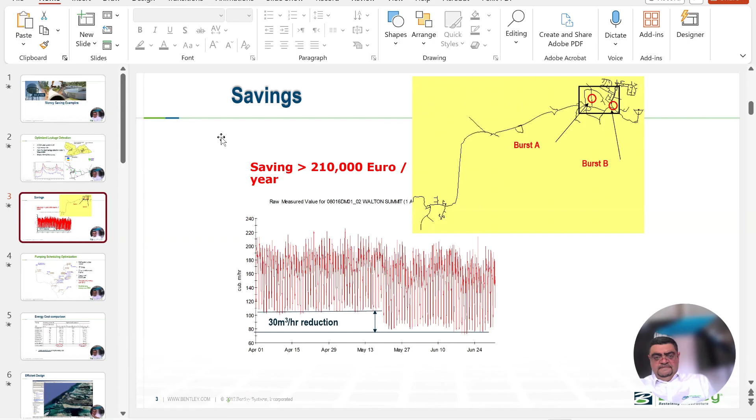The operational phase is actually the electricity bill. For example, I'm not sure if I'm still right, but one time I was on a visit to Nairobi Water, and when we asked about their yearly bill for electricity, it was about, I think, $11 million. Imagine if you can save just, let's say, 10% or 20% of this bill, like $2 to $3 million. That is a huge amount.

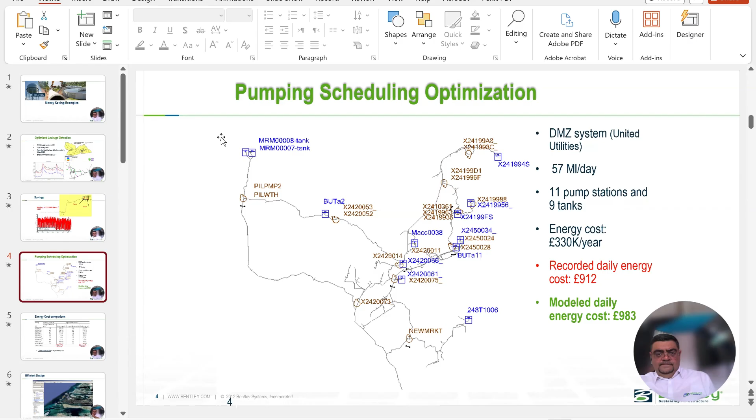This is an example of a DMZ that's using 11 pumping stations and 9 tanks, and their energy cost was about 330k pounds per year, resulting in 912 pounds daily energy. We were able to reduce this from 983 to 700, which is almost 29% of their original energy cost. So this is another place where we can save energy.

Mercy, or someone from Indepth Research Institute, can you please mute yourself? Hello? All right.

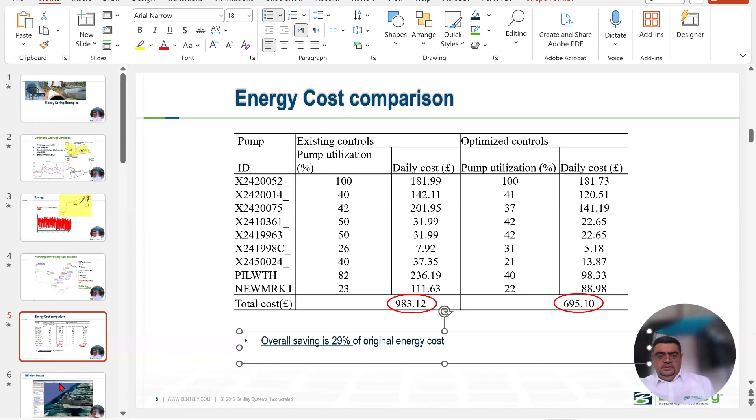Also, when it comes to design, since we have a lot of consultants here, what they normally do is build their design geographically, so they draw their network, and then they go to the Excel sheet, and in the Excel sheet they try to, for example, do the pipe sizing, and that's what we call a disconnected design. Whenever you need to make one change, you have to go to the Excel sheet and then come back again, and that is too difficult.

So in this case, we decided to go to the connected design. Whenever you change the location of the manhole or the pipe size, the system will change the rest of the pipe sizes for you, and it will show you how your system will look. We did a test of one water network study with two consultants. We asked one of the consultants to use WaterGEMS, and we asked the other consultant to do his design. And then we asked for the optimized design.

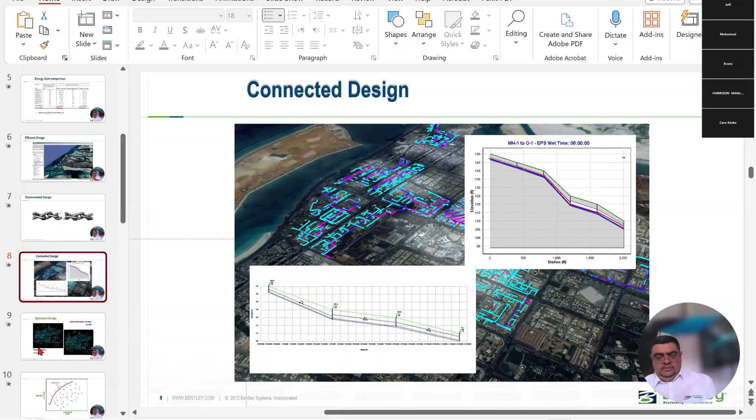After this happened, the big consultants came with a solution for 4.16 million pounds. But when we ran it using Darwin Designer inside WaterGEMS, we got a solution under 2 million, and we chose an optimized solution for 2.14 million pounds. So even when we are designing, we don't want to go for oversizing. We want to design our network right, and Bentley WaterGEMS can do this process for us.

So it depends on the iteration. Normally when you do a design, you say, okay, let me try, for example, a pipe of a size of 100. And then probably it's not enough. Let's do 150. And then, okay, it's not working there. Well, it delivered the water over here, but some other part of the network is not delivering. And then we get into a lot of messes.

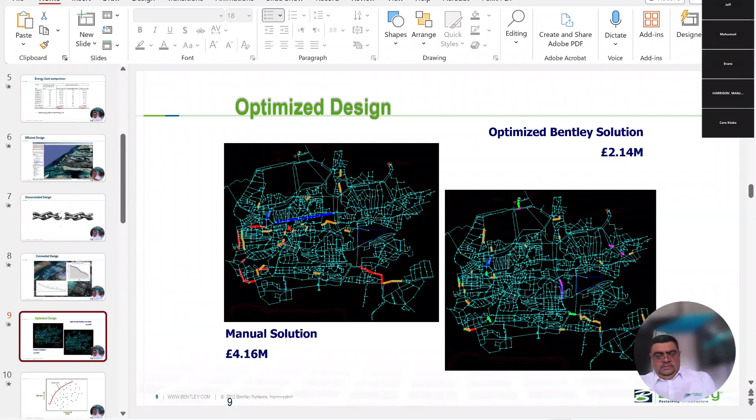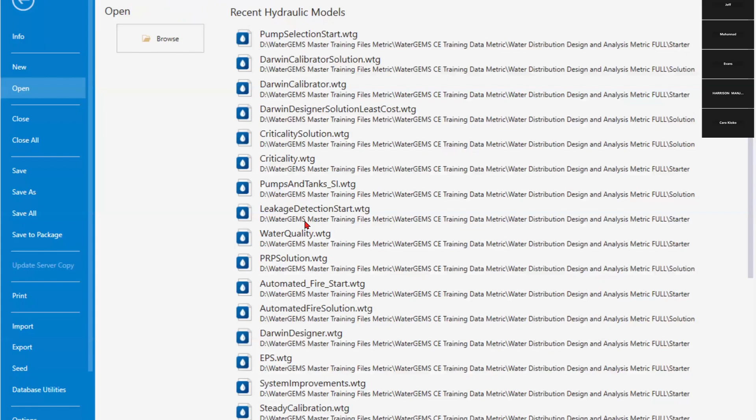Well, we talk too much. Probably now you would like to see how the software is working, and for that I prefer to go to WaterGEMS directly. So this is WaterGEMS, and let's go through the first case. Let me open the leak detection, and let's discuss how leak detection happens using hydraulic modeling and how you can save time.

I get my network here, and this is an isolated network, an isolated DMA. This is the entrance of the DMA, and we have put a virtual reservoir over there. And then I have a few pressure sensors. Let me change the color of the pressure sensors so you can see them more clearly, orange probably; in green it's not that clear. So I got my 6 pressure sensors here.

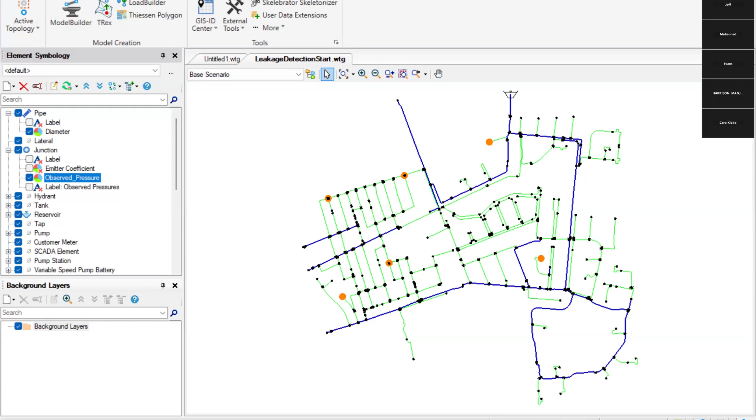Now at the beginning, I want to understand if I have leakages or not. I have my network in an extended period simulation. So let me run my network first. Wait, let me make it a bit smaller so I can control it better. All right. I'm going to go to analyze and compute. I want to compare how much I totally give this network. The demand that I have here is actually the demand that came from the customer meter data.

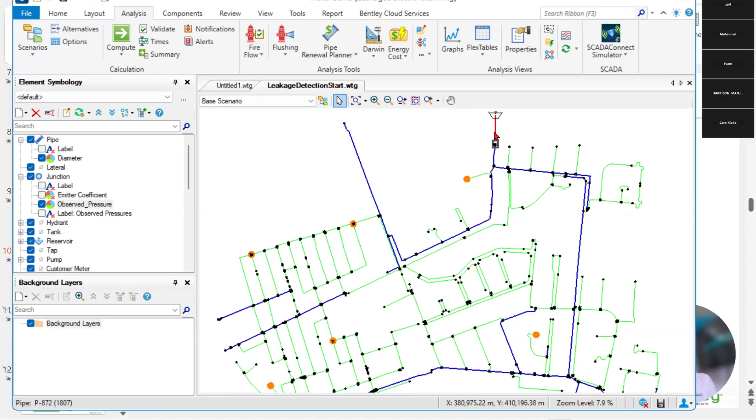In order to find if I have leakages or not, I get the demand from the customer meter data into the network, and I put a flow meter over this pipe here. I need to compare both flows. The total flow from here is what I have billed the customer for. Let me graph it as absolute flow. That is what the customer has paid for. I have put a flow meter over here just after the reservoir, and I need to compare with this value for simplicity.

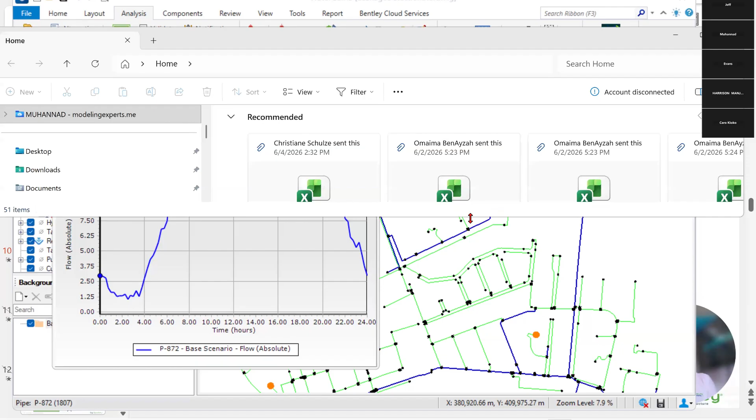Normally we have it as a flow meter. Probably it's connected to the SCADA system, or probably it's just a portable flow meter, whatever it is. But I have my data now here in the Excel sheet. All right, so I get my flow meter over there, and that is my flow meter reading over time.

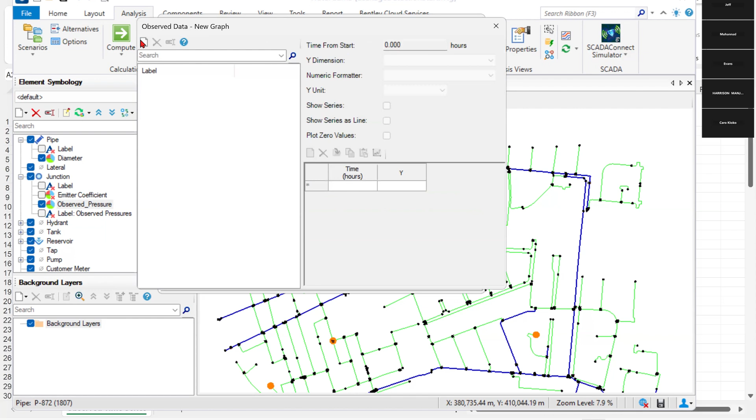In a very simple way, I'm going to right click here, copy it and paste it. This is just for simplicity, but we can do it in an automated process. And that's my graph here; this is my data for the graph. I need to put my observed data from the field, and that is my real supply data. I'll paste my Excel values here and close this one. And that is what I get from my flow meter data in my Excel sheet.

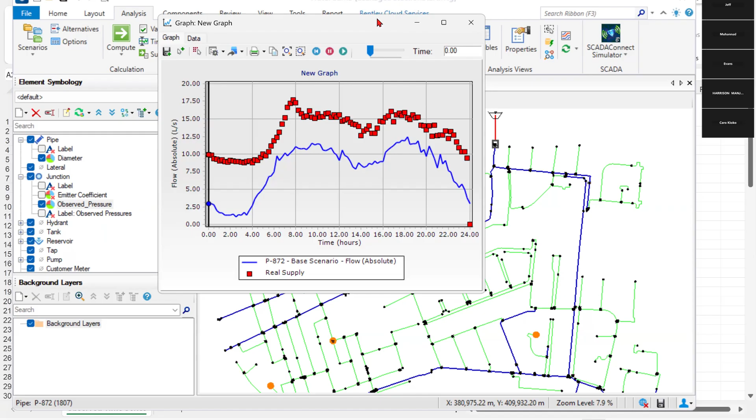So now what I can see here is my real supply, and that is my customer meter data. The area between these two curves represents the volume lost. Now we need to understand where this volume has been lost. To understand this, I have 6 pressure sensors: 1, 2, 3, 4, 5, and 6. You can see them here in orange.

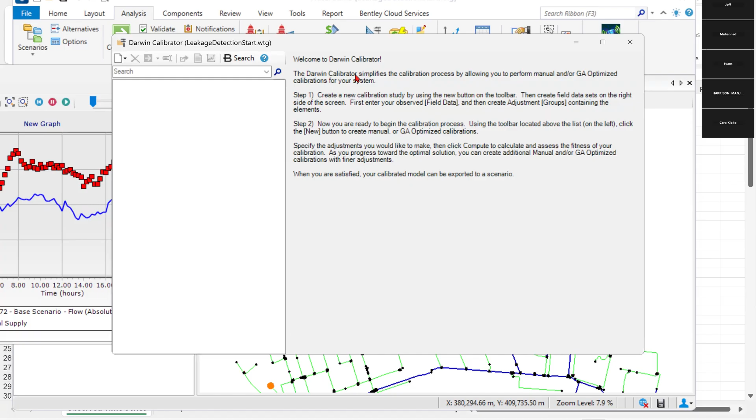I need to bring this data into my Darwin Calibrator in order to understand where these leakages happened, comparing the pressure collected from the field with the pressure from the customer meter data set. Again, for simplicity, I have the data here in the field data. You can see I have the hydraulic grade line of these sensors and the flow meter data.

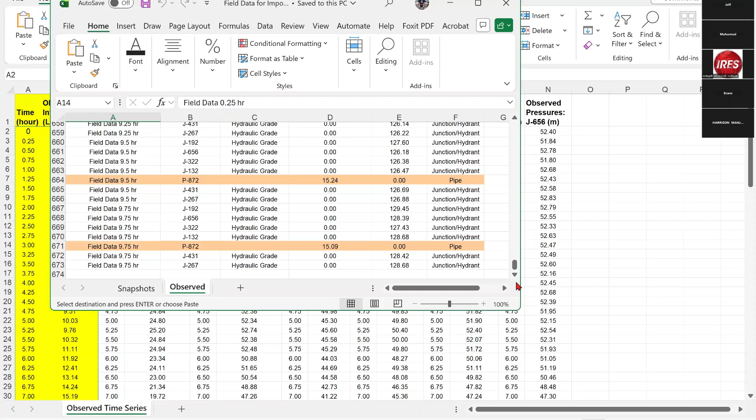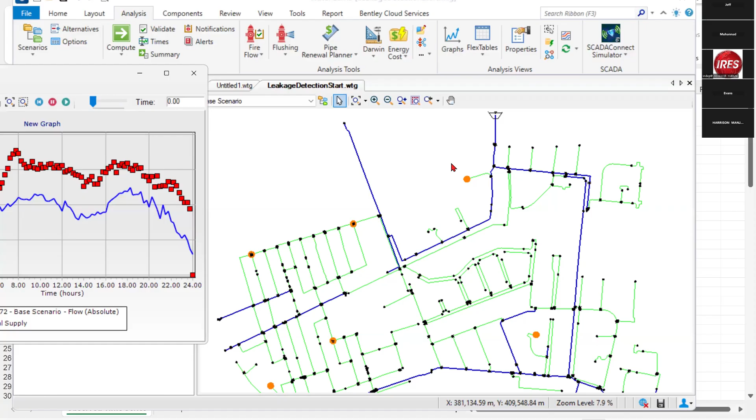And I need to bring this data, 672 records, into my Darwin Calibrator. In WaterGEMS, for any external data that you need, we have a tool that's called ModelBuilder that brings the data from any external data source into my WaterGEMS. So I need to bring the data into my Darwin Calibrator over here, which is now empty. So I'm going to use, in the tools, the ModelBuilder.

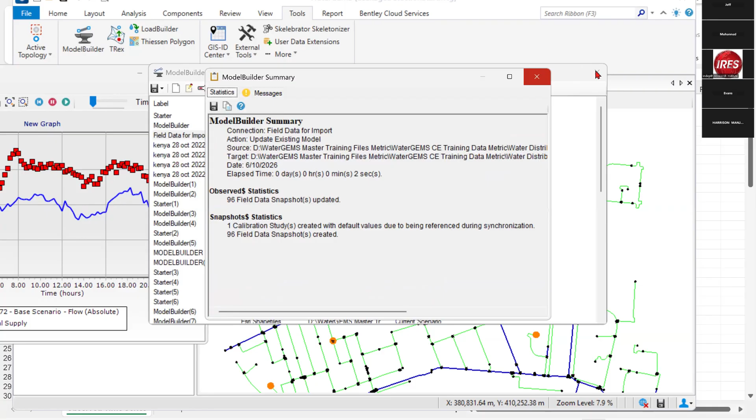And I have specified it previously here. So I'm going to get the data. And then when I put it in the model, I get 96 snapshots and I get 672 records. And then if I go to my Darwin Calibrator, now I'm going to find my data over here.

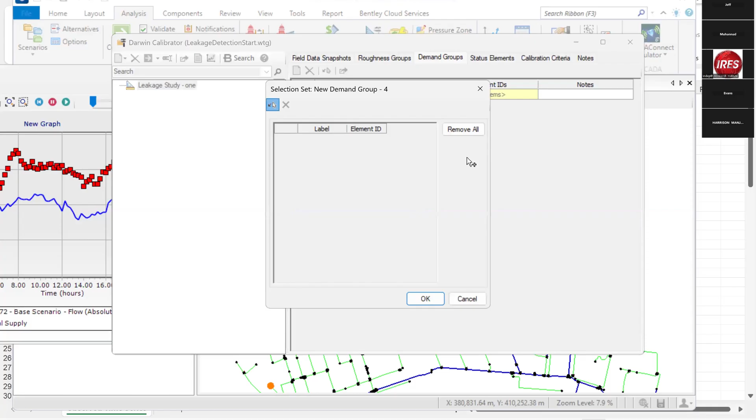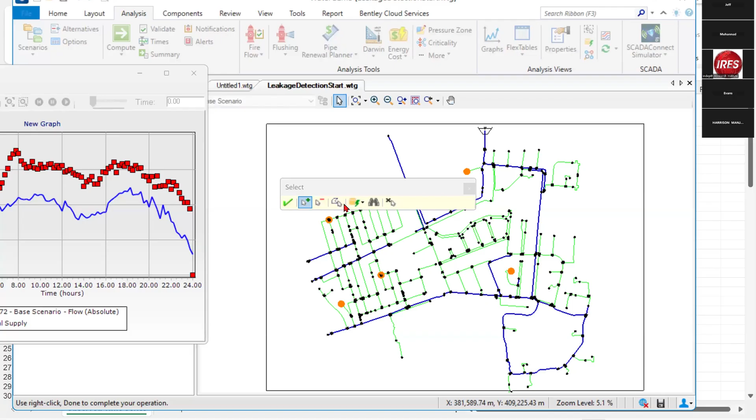Now, what I need to do is to find the leakages. And leakage is a type of demand. So I have to create a kind of demand group. Let me just create a new one. I'm going to add all my nodes in the network. So probably I can zoom a little bit out. And now I select all my nodes. So I get here 701 nodes in this DMA that need to be tested against leakages.

So in a simple way, I can go to a new optimized run here. And then I can go to the demand, and here I'm going to specify my operation. So rather than calibrating a demand, I'm detecting leakage nodes. Leakage acts like a sprinkler. It's a pressure-dependent demand, so it depends on the emitter coefficient. So 0 where there is no leakage, and the maximum is 0.5 for the sprinkler coefficient, and I need to increase every node by 0.01, and I say, detect a combination of 10 leakage nodes maximum at my first try.

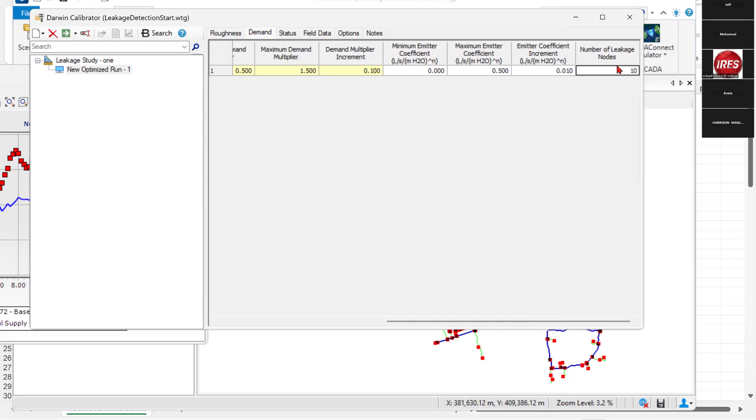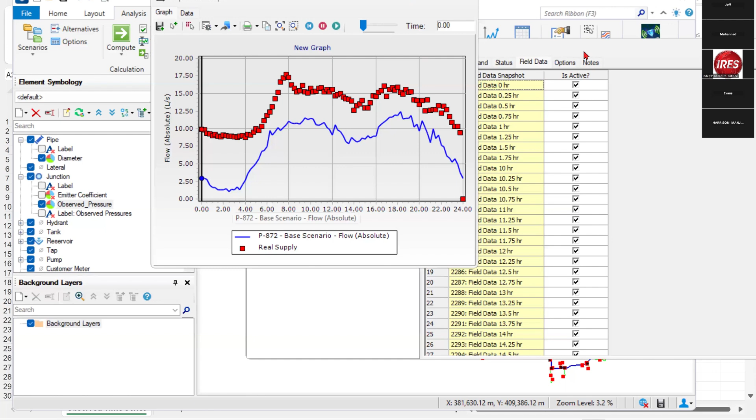And then I'm going to go to the field data here. Here we have it over 24 hours, but normally we use the minimum night flow. And if I go back to my graph, I can find that my minimum night flow lies over here. So probably around 3 o'clock, 2:45, something like that. So I'm going to deactivate all of these, and then go to 2:45, a little bit up. All right, so this is 2:45.

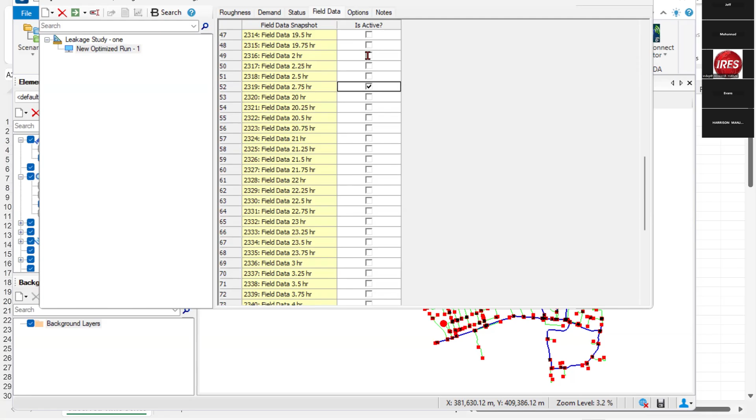And then I'm going to go to the options. I say, go through 50,000 trials and give me your best solution. I'm going to run this one. It will go to my network over here, selecting at the beginning maybe 2 nodes, then 3 nodes having leakages, then 4 nodes, adjusting the leakages, putting the pressure-dependent demand, and making multiple combinations for these nodes. And each time you can see my fitness is reducing with my trials until it finds the best situation of my leakages.

So let's give it about a minute more. What happens is that it goes to every node, sees how the hydraulic grade lines look, and then it changes the flow and the demand of that node until it matches. And you can see with the generations, my fitness, which is my error, is being reduced until it reaches a compromise solution. After 50,000 trials, this gives you a very good quality of testing, and it gives you the minimum error one, and then you have to go to these locations to test if you have leakages or illegal connections or not.

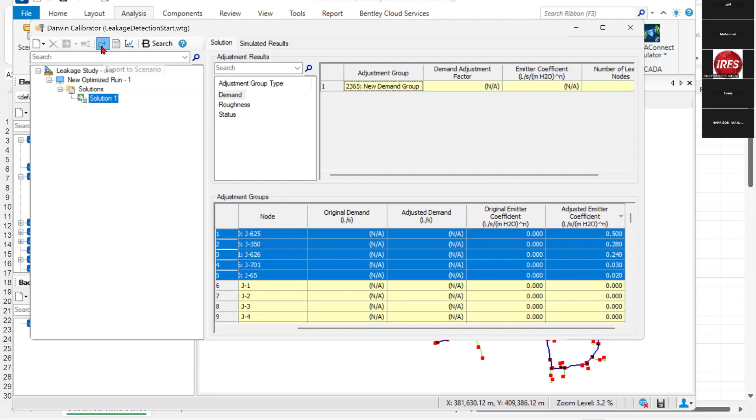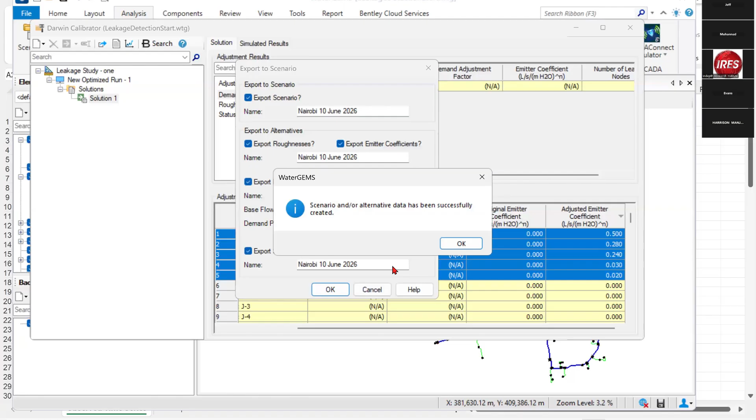So I get my solution, and if I sort this descending, these are the nodes. I got 5 nodes that have leakages. And now I need to understand where these nodes are. So I can go to the solution over here, and I can export it. And I can say, this is Nairobi, 10th June, 2026. And then I'm going to rename my alternatives. And when I click OK, my scenario has been created. And I can find my scenario here, Nairobi, 10th of June, 2026.

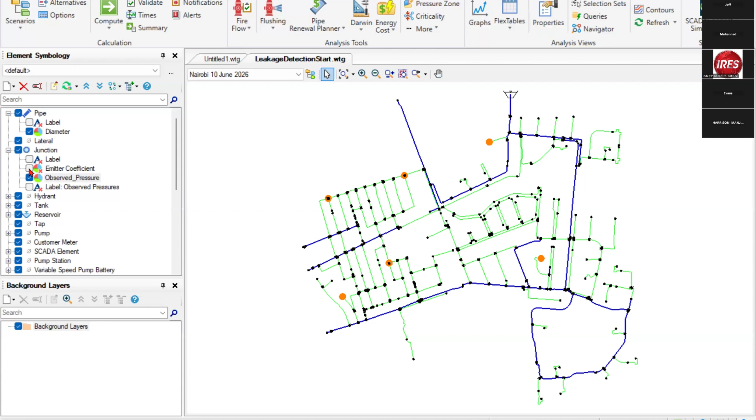So now where are my leakage nodes? Simply, I'm going to look at my emitter coefficient. And I can see that there is a huge leakage over here, and 2 small ones over there, and a medium leakage over the pipe here. And if you go with your acoustic device after that, you're most probably going to find the leakages at these locations. So we're not fully eliminating the noise logger or the helium method or the ball method, but we limit your search area to where the leakage is happening. And that is how we do leak detection with hydraulic modeling.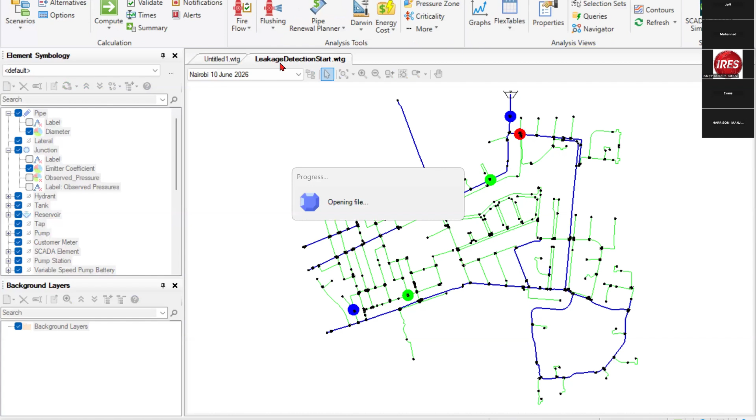Well, as I told you, the other part of the network is about pumping and pumping pricing.

So what we have here is a city called Prague. And this is the touristic district of Prague. They came to us, they said, during the high season, we have no problem. But during the low season, if the cubic meter costs $1 for pumping in the high season, in the low season it costs 2.5. Say, what? Why? Is your network over pressurized? They said, we don't know, but maybe.

And then, of course, it's over pressurized. It's like they got here where their pumping station is, and they have an equalization tank over this area. And then they are pumping from two big pumps. These two big pumps. And then a consultant came and they asked them that, okay, if that is the case, and then they add another two small pumps.

Good idea, but this is not how we should do it, actually. We need to do our study in a different way. So Bentley had created the pumping station concept, and the pumping station concept idea is to create for me a combination pump curve. So here I get two big pumps and two small pumps.

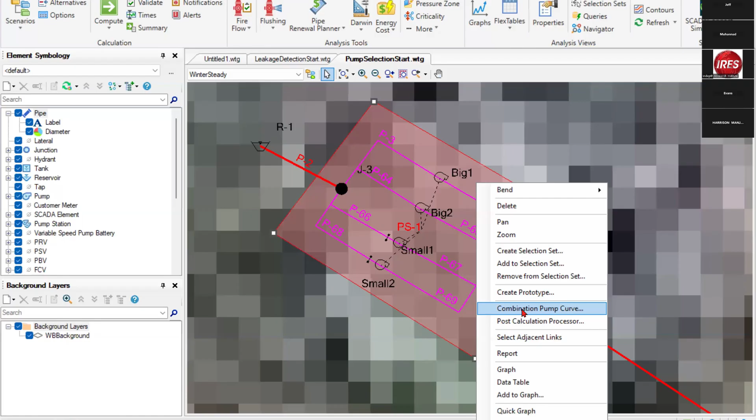And then if I right click here and say pump combination curve, it gives me all the possibilities here. So this is the big pump, this is the small pump, and the possibilities to operate this pumping station. It's either one big pump, two big pumps, one small, one big, one small, two big, one small, and two small, and one big, and the full capacity of the pumping station, it's two small and two big.

Okay. Let's suppose that we need to run at 500 liters per second. In that case, we need to know which combination gives me the best efficiency point during that time. So I'm going to remove the head curve from here, post the efficiency, and calculate. And then that is my efficiency. And then during my design, I have to design my pumping station with a pump selection in order to have a wide range of flow that's giving me the best efficiency. And here it's somehow good.

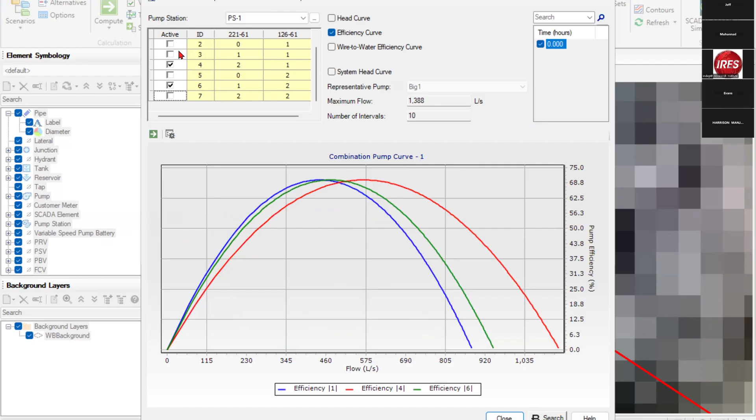But if I'm running at 500 liters per second, which is somewhere here, I'm going to keep the blue color one, which is efficiency 1, efficiency 6, the light green, and the red, efficiency 4. All right, so let me switch the others off. So I need 1, 4, and 6, and nothing else. So if I'm running at 500 liters per second, probably efficiency 4 is not required. And in that case, the best combination of the pumps is either I switch two big pumps or one big pump and two small pumps.

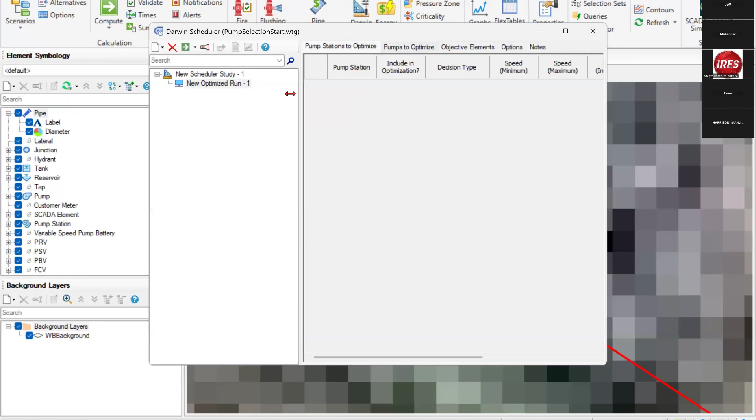All right, that is good, but I need to understand how to build up my schedule, my controls, how I'm going to tell my operator to run with this schedule. In order to do this, I have in the analysis here something called Darwin Scheduler. And in Darwin Scheduler, I can create a new optimized study. And then for the pumps to be optimized, I can select these pumps.

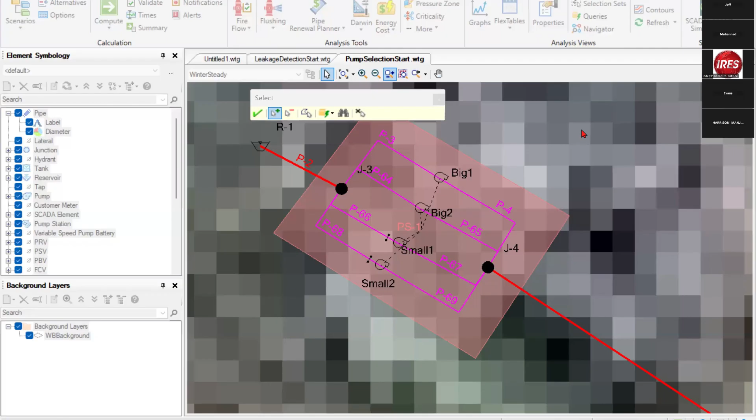But during optimization, I need to give it my constraints. So for my constraints, I'm going to say, well, I have pressure constraints for all my network, and then I can give it a minimum and maximum pressure, velocity constraints, and how many times I allow the pumps to start and stop. For example, my maximum is 5 times per day. Yeah.

And also, I have a minimum at the tank and maximum at the tank. And then I can give the tank minimum and maximum here. And then when I'm done, I can compute my model. Sorry, that is steady state.

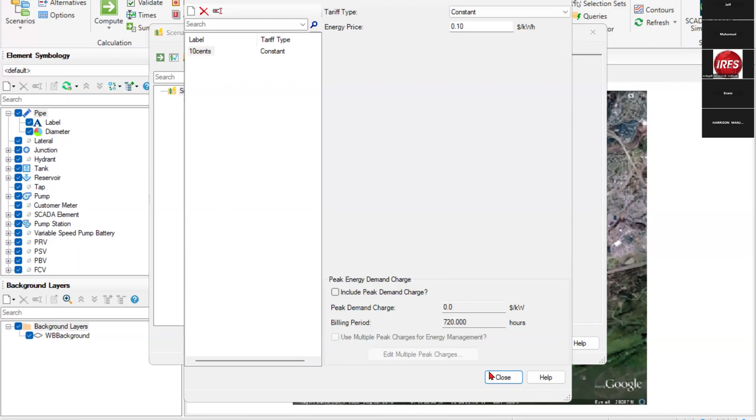And then when I'm done, I need to understand how much I'm going to pay for electricity and how my pump will operate. And in that case, we can use the scenario energy cost. And then in the energy cost, I can build my tariff, either constant or a variable tariff. And then I can compute, and then I can get for each pump what will be my daily cost. So this is my daily energy cost.

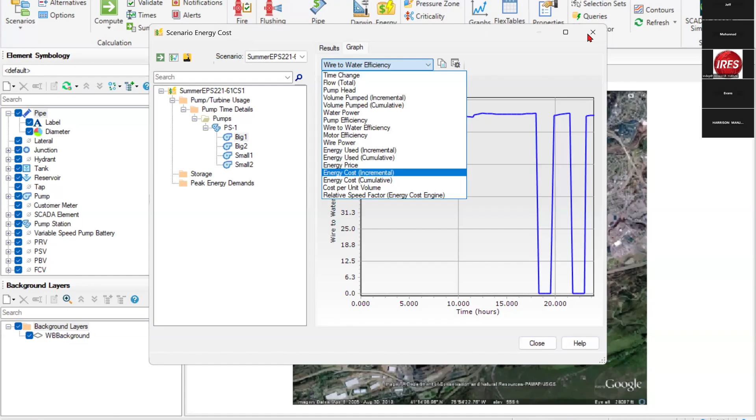For the pumps. And for example, what is my, let's say, accumulative energy cost, and how I spend these. So all this information, my graphs here. Now, this is one part of WaterGEMS for the operator. Let's move to the designer.

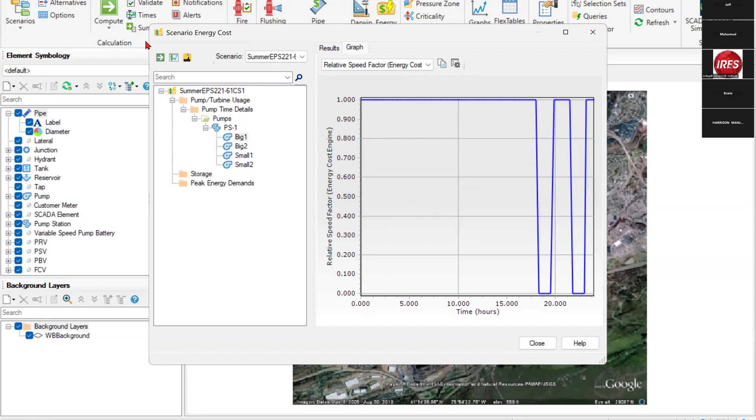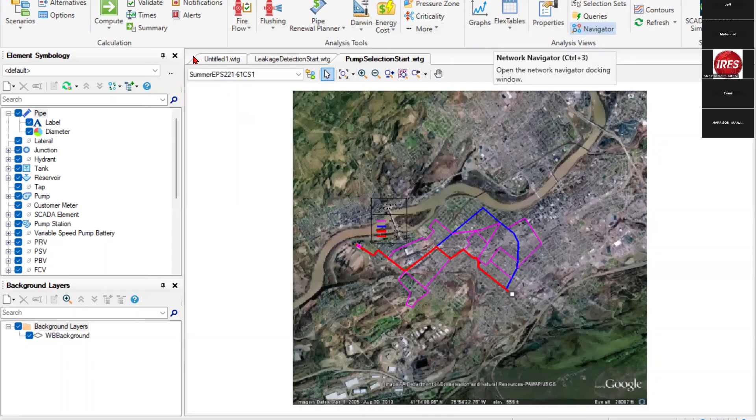So let me add a new file, let's say, designer solution. All right. And let me have a look at my scenario. All right, so let me delete these two. I don't need them. Make this current. All right. I got a network here.

And all these pipes that are colored, they are as-built drawings. However, I have a path where I can place my pipe. For simplicity, for the time being, I added it as a 1-inch pipe. See, if I double click over here, you can see that it's 25.4 millimeters. All right, so any gray color pipe you can see here is just a path where I can place my pipe. It's all 25 millimeters.

And now we need to understand what's going to happen if I add 189 liters per second at junction 500. At the time being, junction 500 is at 0 demand, and the system is running fine. Okay, so let's run the system and check what's happening. If I compute, I can see that there is no problem because I didn't add any extra demand at junction 500.

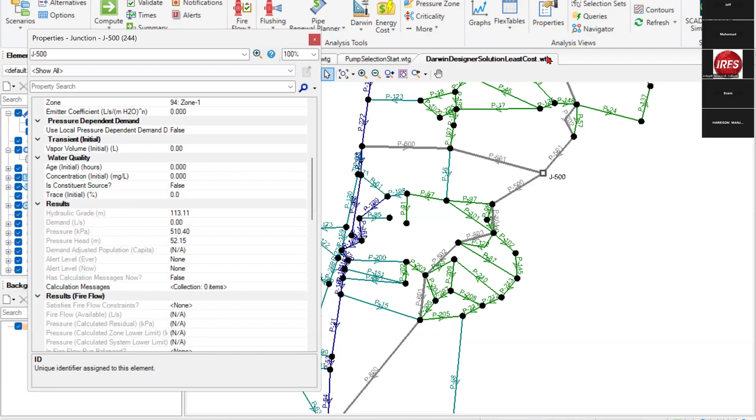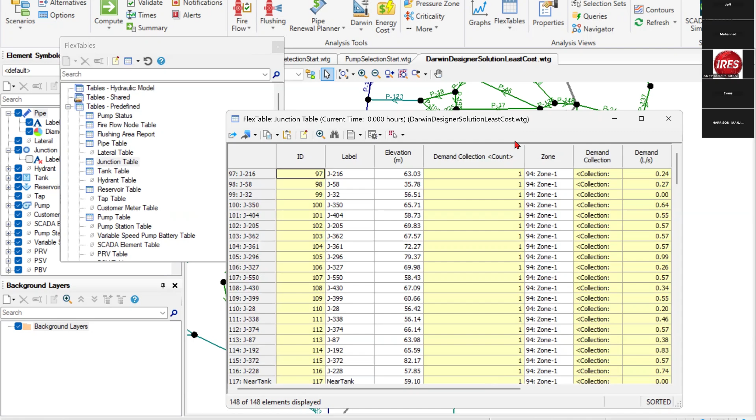If I go to the flex table over there, double click on the junction, and go to the pressure, if I check the pressure range, I can see that my maximum is 810 kPa, almost 8 bar, and the minimum is 2.7 bar.

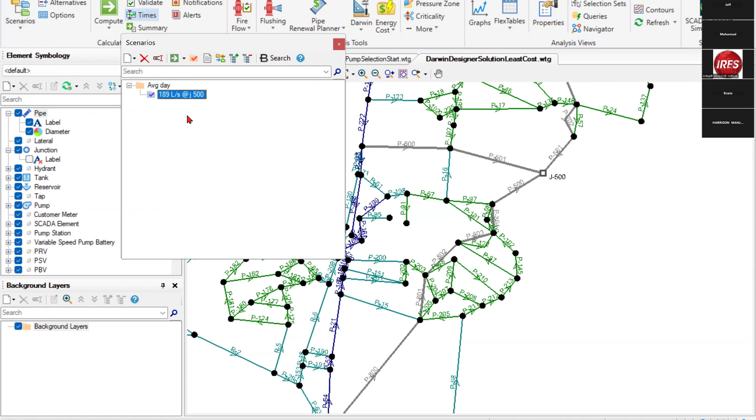All right. And now I'm going to ask the system, what will happen if I add 189 liters per second at junction 500? Good question, but it's not going to be a good answer. Because if I make this current and then compute, it says negative pressure, pump exceeds its maximum operating point, and a lot of problems. And if I go to the flex table to check my junction pressures, it's going to give me an unbalanced network. I don't care what this number is, but it's an unbalanced network.

All right. So now what we need to do is redesign it to have 189 liters per second at junction 500 without affecting the network. So how to do this? I have drawn my pipe network over there. And now I need to ask the system to optimize the design for me. And how do we do this? We get here something called Darwin Designer.

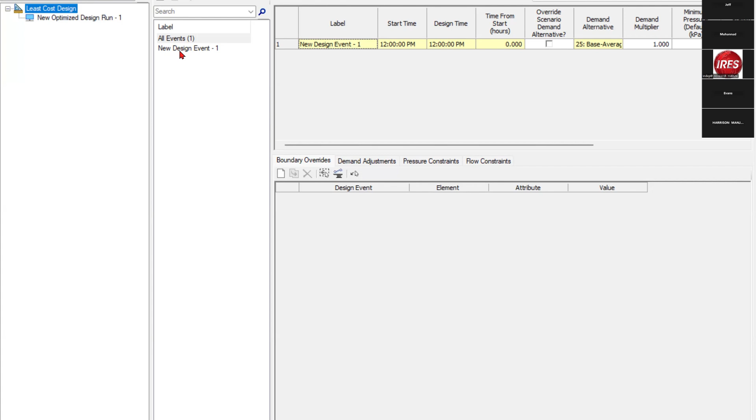All right, so let me delete this design. It's an old one. And I also need to delete this design group because they don't relate to here. And let me start. So I need to tell the system the story step by step, and the step-by-step is tab by tab, like here. You have to go through them one by one. And then I'm going to create a new design, optimized design, and then the design events. What are the design events? Let me tell you. This is a new design event.

First of all, I need to adjust the demand. So I'm going to tell my system junction 500, 189 liters per second. All junctions should fall between a minimum and maximum pressure. Let's have 1.3 bar, for example, as a minimum. It depends on my design criteria.

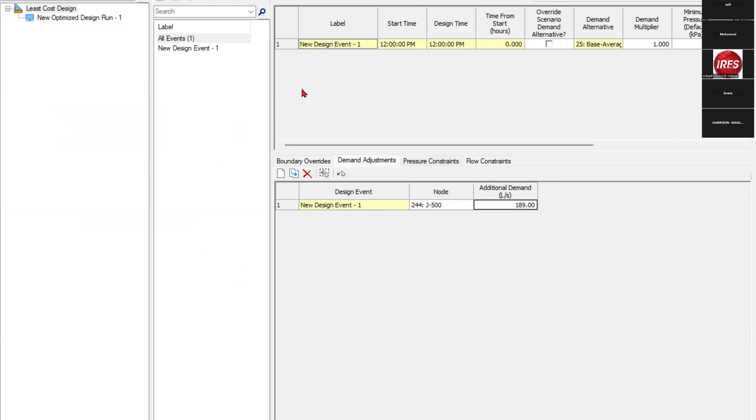And I'm going to tell my system, listen, the first pipe group will be the must loop. And then in there, I'm going to select to loop my network. I'm going to create west, north, and south. All right.

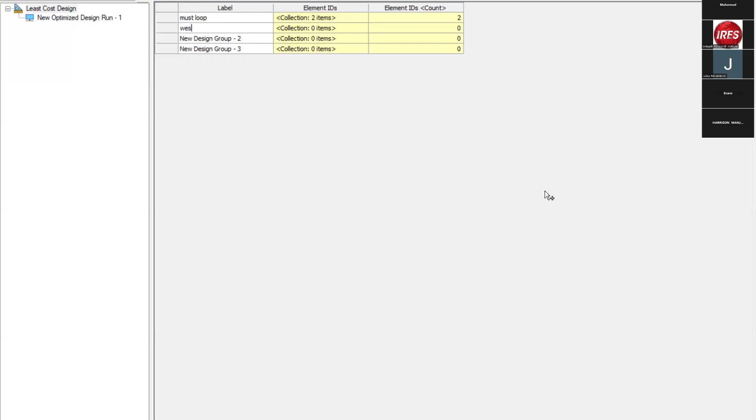I say, well, I'm allowed to change the pipe size, and I put them in a group. Oh, I'm going to get them from the south. And don't forget that I put this pipe in the must loop, so it's in a different group. And pipe duplication is not allowed here.

And then I build my design group. I have my cost property here. So I get the must cost. That is the pipe that you're going to design from, and that is their cost per meter. And that is the optional. With the optional, I have one with a 0 diameter here, so I can take it out of the network.

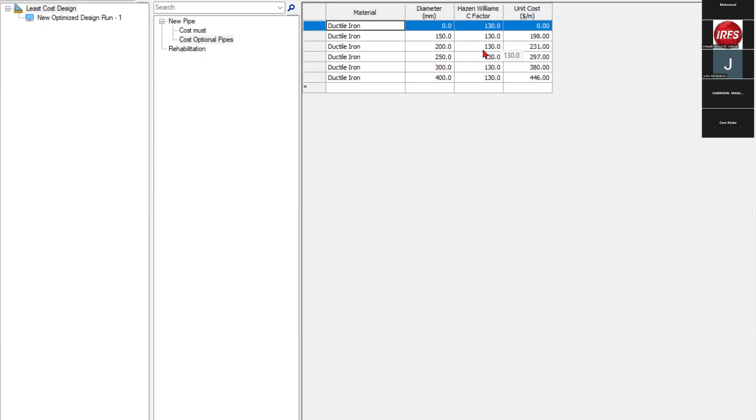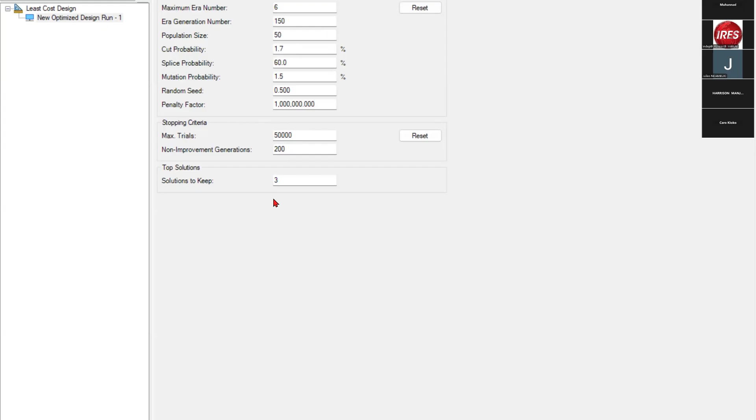And then I'm going to go to the design here. I'm going to say, give me minimized cost. In the design, I'm going to assign that this is a must and the other pipes are optional pipes. So the must loop must be there. West, north, and south paths are optional paths. I'm going to go to the options. I say, well, put 50,000 trials, keep the first three solutions, lowest cost.

I'm going to compute. It will start searching for the lowest cost. And it's going to tell me that my lowest cost is $175,000. That's solution number one. If I click on solution number one, it brings the water from the north at 200 millimeters, and the loop is 200 millimeters, and then west and south will not be there.

If I export this scenario as Nairobi 10th June design. Sorry, I'm really bad at spelling, so sorry for this. All right. And then if I close this one, I'm going to find my scenario over here.

If I click my scenario, you can see that the north path now has a different color. You can see here, that is my average day. It was gray. It was 25 millimeters.

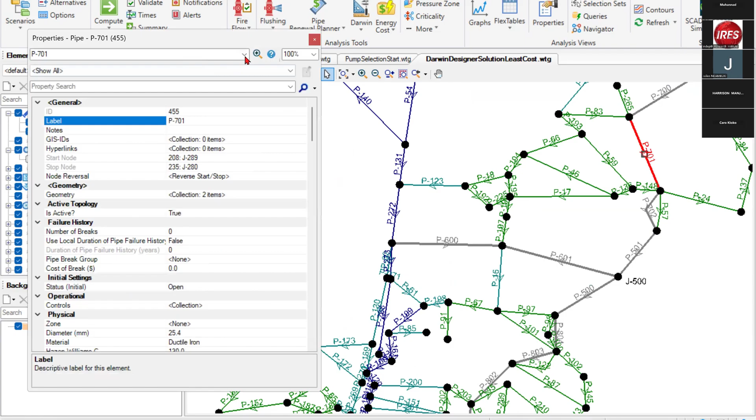And now if I change the scenario, it is the 200 millimeter ductile. And now let me run and compute. I deliver 189 liters per second to the junction 500. And at the same time, if I go to my flextable, sorry, to the junction, I can see my pressure range varies between 791 and 280.

Is this my best solution? The answer is no. And why? This is a part of optimize for the lowest cost. But I need this line. I need to cancel all this trial and error, which is like the 50,000 trials that I have gone through. But I don't want this one. I want the full line, and I want to decide where I want to stop.

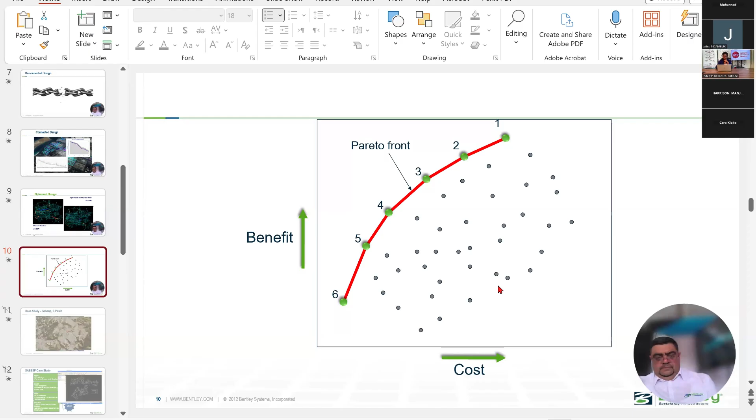And then in that case, we can get back to Darwin Designer over here. I'll say, hey, Darwin, I didn't like your events. And now, in the design events, while I'm in the pressure constraint, I'm going to consider the pressure benefits. To who? It's to your best customer. And in this case, junction 500 pays part of the money. So I'm going to consider the pressure benefits over the junction 500.

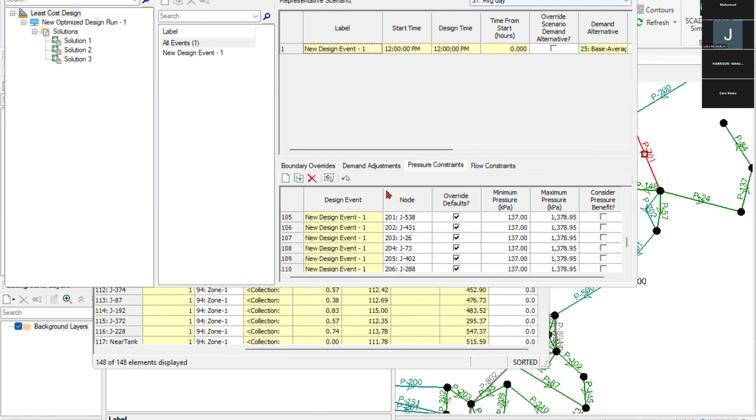And I'm going to give it a budget. Rather than minimize cost, it's a multi-objective trade-off. Normally, I multiply by 3 the budget of the lowest cost. So the lowest cost was 175,000. So $500,000 is fine, 600,000. And then I'm going to go to my optimized run and compute again.

Sorry, 1 second. I forgot to change the 3 to 20. But let me do this again. Let me finish. It's going to take 3 seconds. So I need to go to the options and change this one from 3 solutions to 20. Maybe 20 is fine, maybe 15, 10, I don't know. And when I run it, multiple solutions. So this 50,000 is actually how many trials, and these are your nodes here. That's what the 50,000 over here

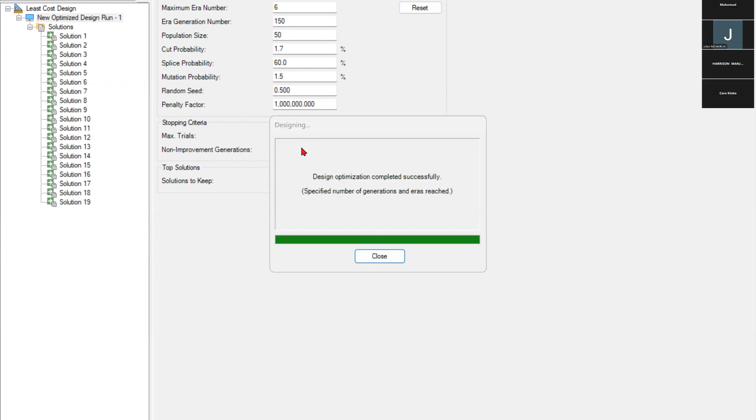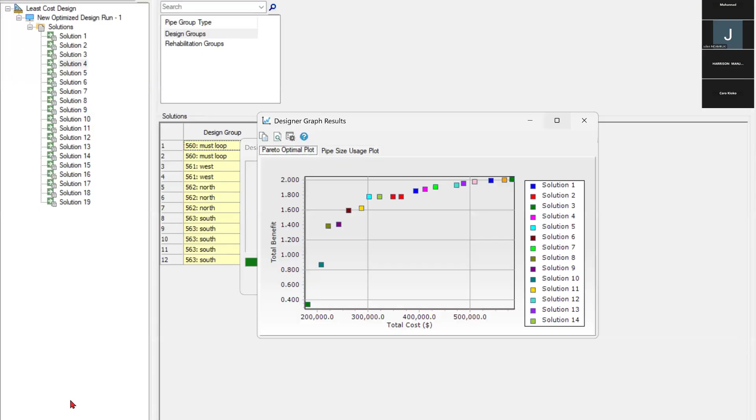means. And now, this 19 solution is one of the solutions, and I say graph my Pareto front, that is my Pareto front. So I can manage to do it with 175,000. But I can add a little bit more money and jump with the benefits. While here, I'm adding a lot of money without benefits. So if it comes to me, most probably I'll stop at solution number 5 or probably solution number 8.

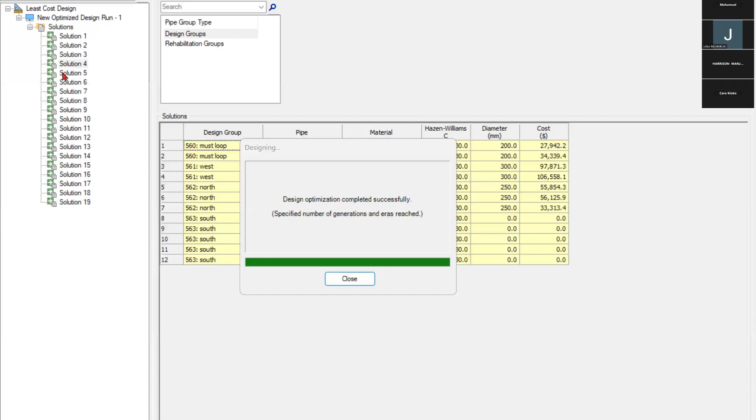So if I have a look at these two, solution number 5 brings the water from the west at 400 millimeters, so I can export this one. I'll call it S5. I'm a lazy man. Sorry. And solution number, what did we say? Solution number 8. Solution number 8, also from the west.

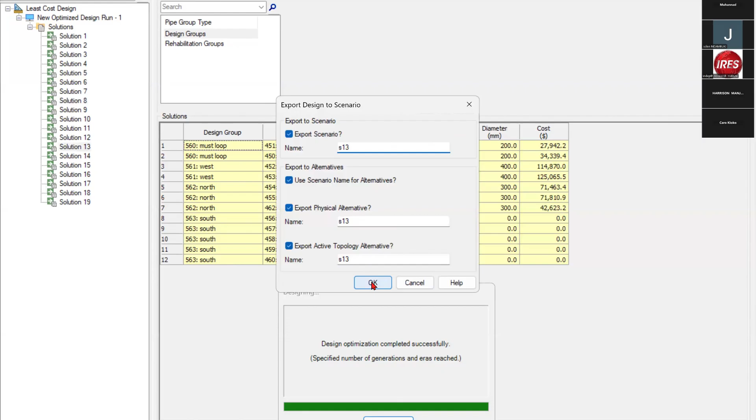Let me check the other solution. So this is from the west and from the north. It's a bit expensive solution. Let me export it as well. S13. And if I close this one, then I'm going to find my solution over there.

If I click on S5, I'm going to bring the water from the west, and these pipes will be inactive. So is active is equal to false. If I click solution number 13, I'm going to bring it from the north and the west. And solution number 8 is also from the west, but at a different diameter. Let me batch run the scenario.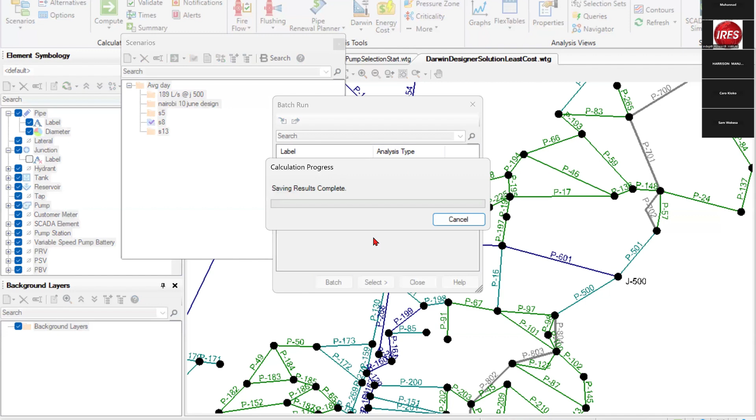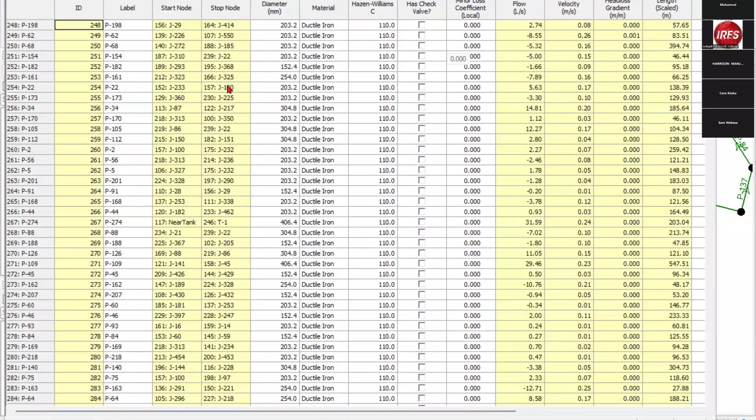And we can go to the flextable again, to the pipe, and then we can see here, to the junction, our pressure. So if I go to the junction over there, I can see my pressure, how it varies between the solutions. And all my pressure will be okay, and my network is really optimized to my needs.

This is what I want to say about WaterGEMS. If you have any questions, can you please raise them?

Hello? Am I live? I'm not sure. Hello? Can you hear me? Hello? I'm not sure if I'm online. Hello? Can you hear me? Yes, I can hear you. Go on. All right. Sorry. That's good. All right. So this is what I want to talk about WaterGEMS. I think I took a lot of time.

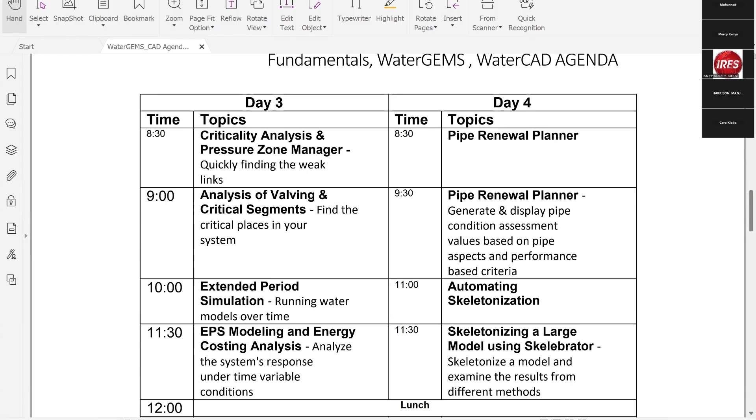And then how to import the data, automated model calibration as well with Darwin Calibrator. And then we will go deeply into leak detection, optimized pipe sizing, and water quality. The course is going to be 5 days and 1 more day optional for the final project.

In the final project, we're going to get data from Nairobi, which could bring us a few parcels, or any data that you prefer. And then we're going to do our design on top of this data on the last day, which is day number 6. So we're going to add 1 more day for that.

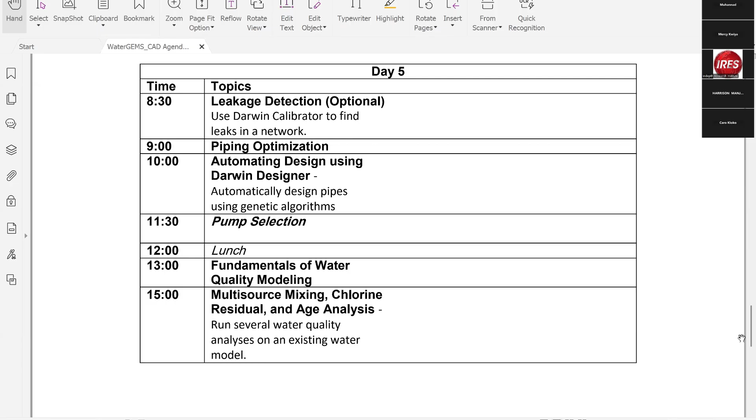Hello? And if you have any question, please let me know. Yeah, Julius? I don't have any question. All right, thank you, Julius. Anyone else? All right.